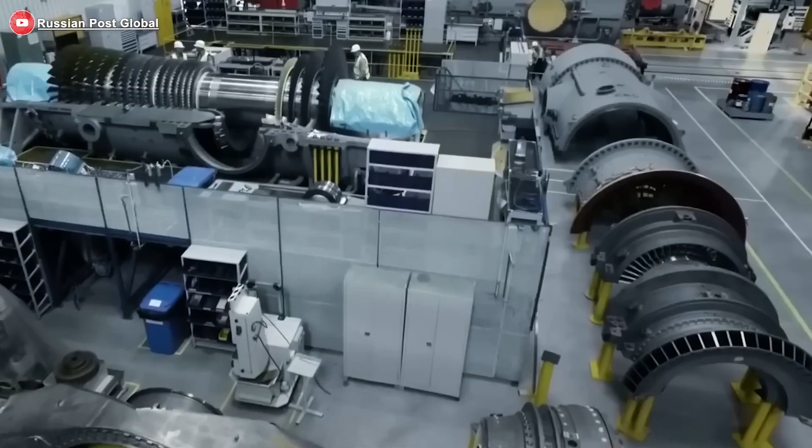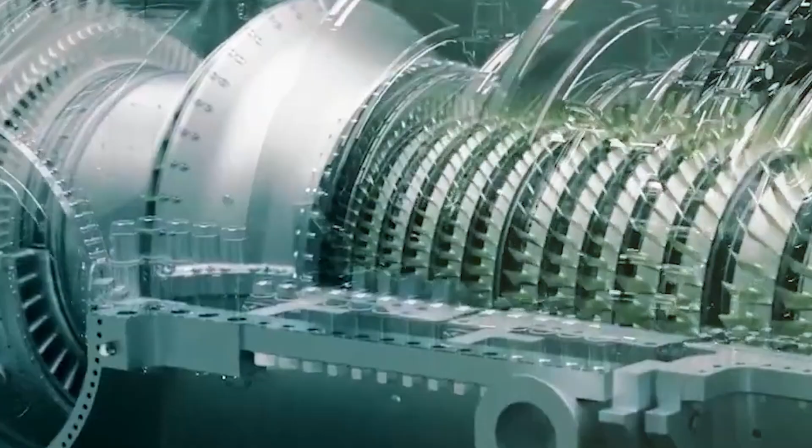For decades, the global energy landscape has relied on a handful of powerhouse manufacturers for its most critical components. But what happens when access to that technology is restricted? The answer, for Russia, lies in a new engineering marvel, the GTD-110M. This isn't just another engine.

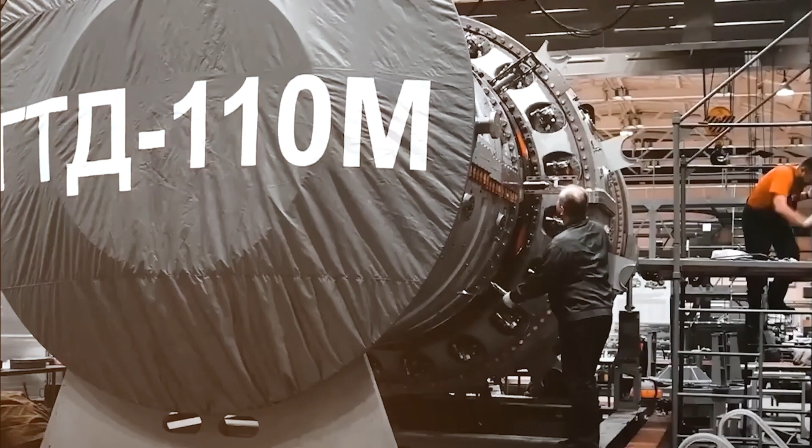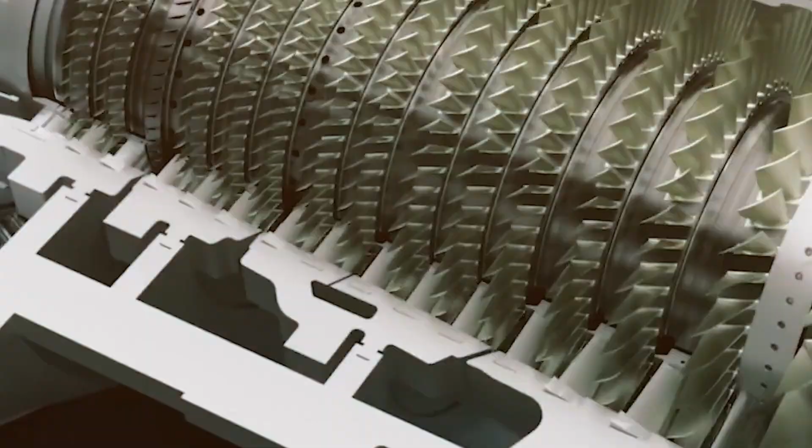It's a strategic leap designed to redo an entire industry. While often discussed in broader terms of changing aviation, the GTD-110M's true impact is far more fundamental. It's about energy sovereignty and powering a nation. Join us as we explore how Russia's new GTD-110M is poised to significantly alter its energy future, reduce reliance on foreign technology, and secure its power independence.

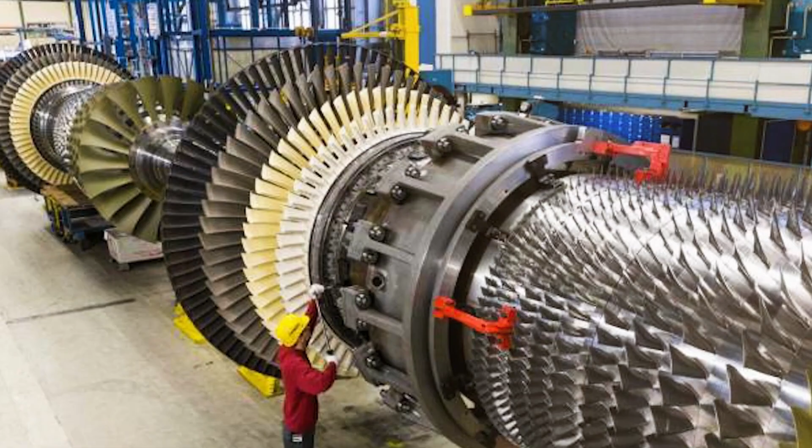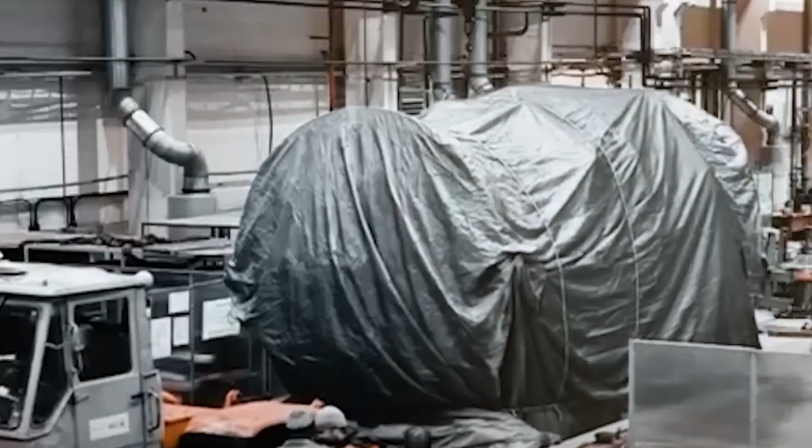For years, Russia's energy sector, despite its vast natural resources, faced a critical dependency. The high-capacity gas turbines, the very heart of modern power generation, were often sourced from Western giants like Siemens and General Electric. This reliance became a vulnerability, starkly exposed by geopolitical shifts and the imposition of sanctions. It spurred an urgent, ambitious drive to develop a domestic solution capable of matching, if not surpassing, international standards.

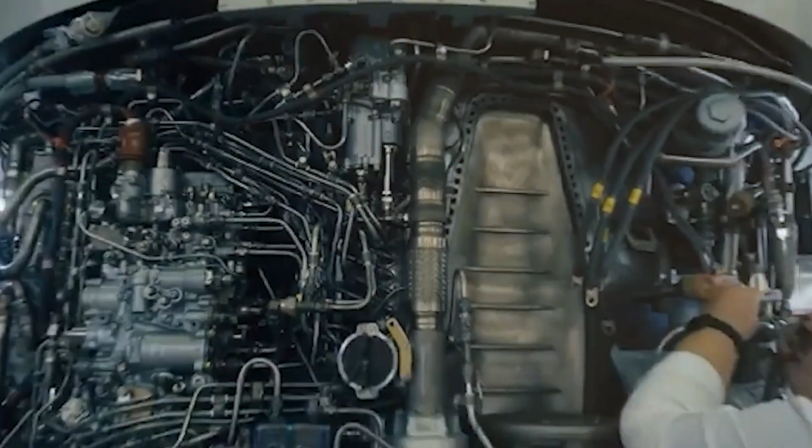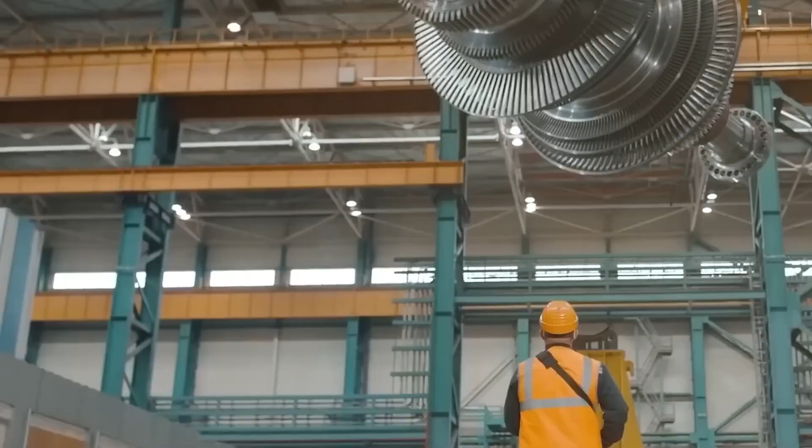Enter the GTD-110M, developed by Russia's United Engine Corporation, UEC, part of the state corporation Rostec. This is not an engine designed to propel aircraft through the skies. Instead, its domain is the industrial landscape, specifically powering gas turbine and combined cycle power plants. It's an industrial gas turbine, a titan of energy production, designed to generate electricity and heat with immense efficiency.

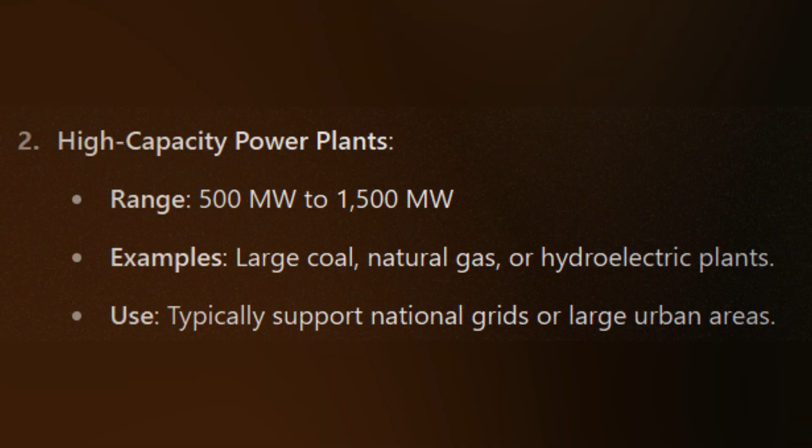Context aside, what makes the GTD-110M so revolutionary for Russia? First, its power output. Capable of generating approximately 120 megawatts of electric power, it falls squarely into the high-capacity segment, directly competing with powerful turbines previously imported from abroad.

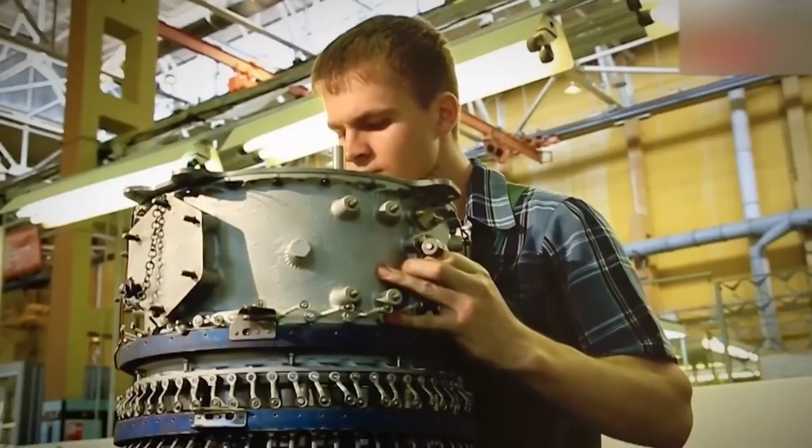Second, its design innovation. UEC claims the GTD-110M boasts lower weight and dimensions compared to its foreign counterparts, offering greater flexibility in delivery and installation. This is achieved through advanced manufacturing techniques, including the use of additive technologies or 3D printing for complex components like its low-emission combustion chamber swirlers.

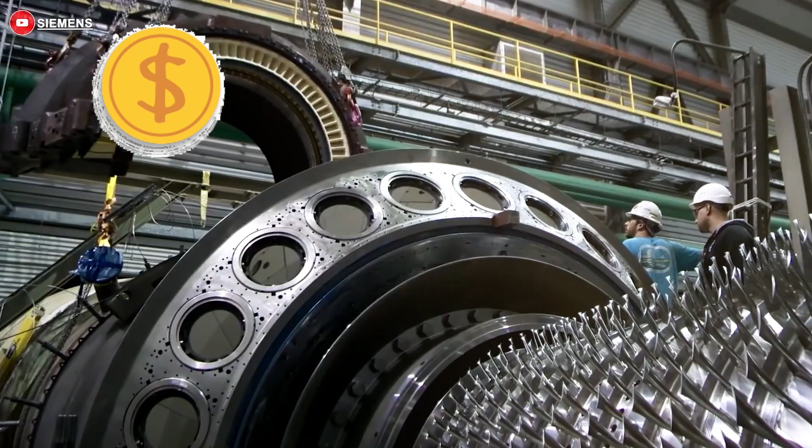Third, and crucially, its high fuel efficiency, translating to lower operational costs and reduced environmental impact, aligning with modern energy demands. The impact of the GTD-110M extends far beyond mere technical specifications. This engine represents a strategic turning point for Russia.

It's a direct response to the need for technological sovereignty in a critical sector. By producing its own high-power turbines, Russia aims to bolster its energy security, modernize its thermal power plants, and reduce the financial burden of relying on foreign expertise for maintenance and parts.

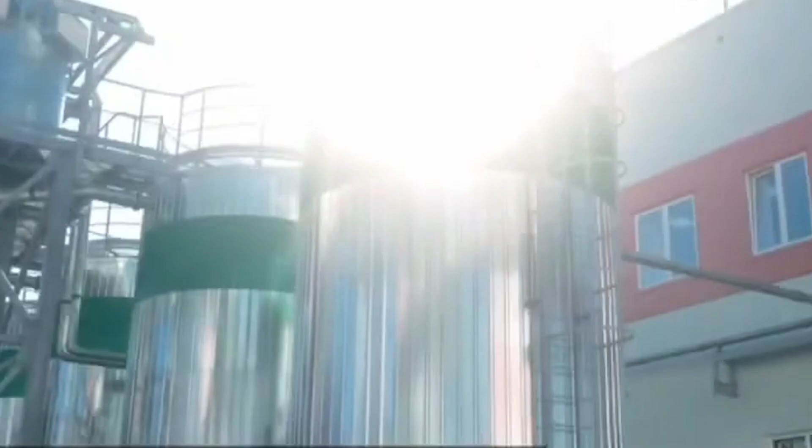From 2024, plans are in place to ramp up serial production, with projections of manufacturing multiple units annually. The GTD-110M has already seen significant milestones. It has undergone rigorous testing, with its first serial unit being prepared for commissioning at the Udarnaya thermal power plant in the Krasnodar territory, a facility described as Russia's most technically advanced combined cycle thermal power plant. Its successful integration and operation are critical for proving its long-term reliability and performance in real-world conditions.

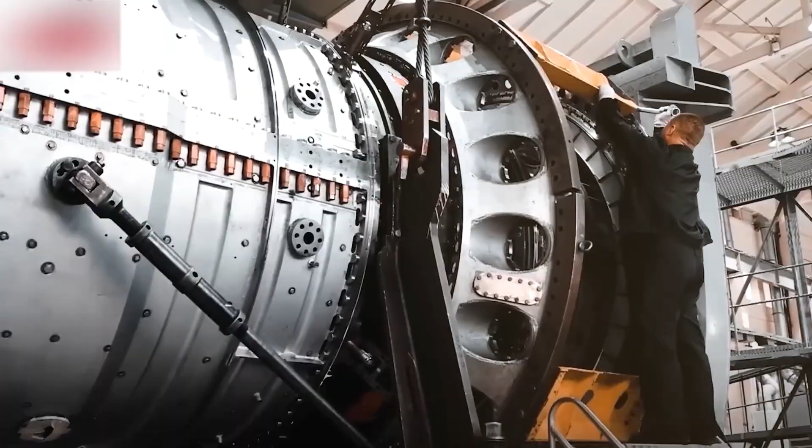This isn't just about an engine, it's about a nation's resilience and its determination to forge an independent path in high-tech industrial manufacturing. The GTD-110M embodies Russia's ambition to overcome external pressures through domestic innovation, asserting its capabilities in a global landscape marked by evolving challenges.

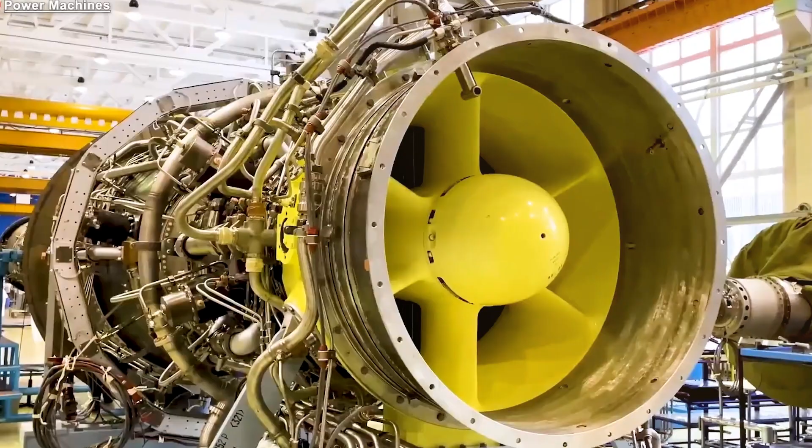The GTD-110M stands as a powerful symbol of Russia's drive for energy independence and its commitment to developing sophisticated industrial technology. It might not be soaring through the skies in commercial jets, but its transformative power is set to resonate deeply through the very infrastructure that lights homes, powers industries, and secures the future of a nation.

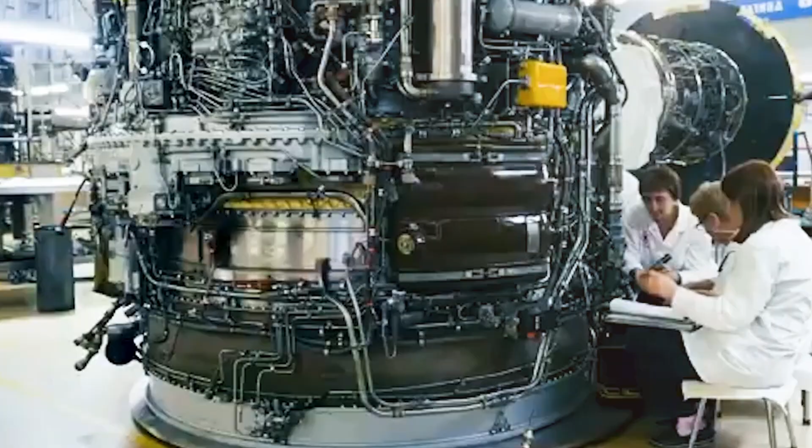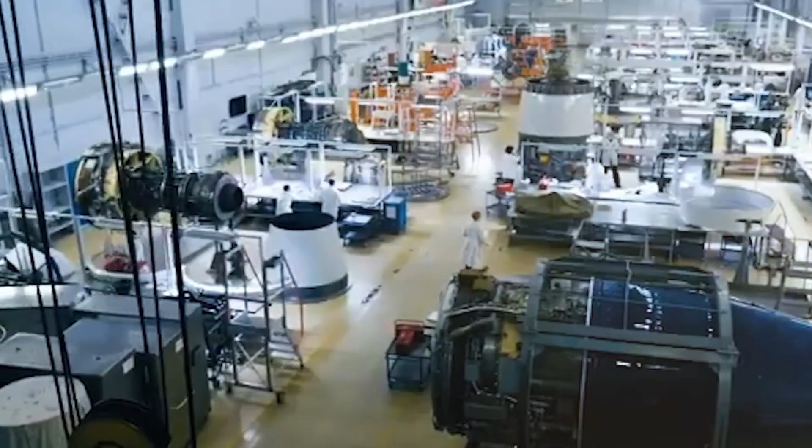What are your thoughts on the significance of Russia's GTD-110M engine for its energy future and technological independence? Do you believe it will fundamentally shift the global energy turbine market? Share your perspective in the comments below.